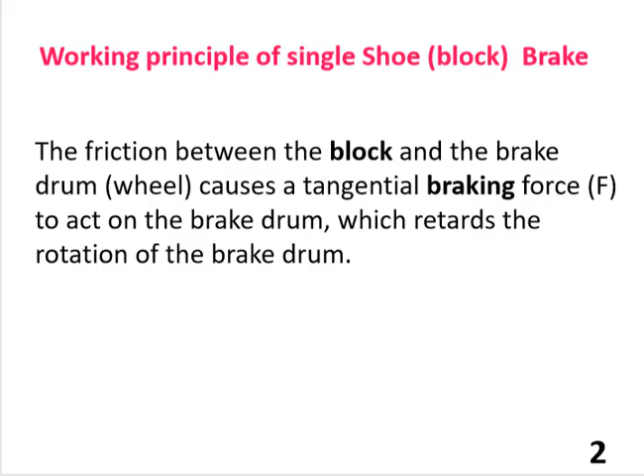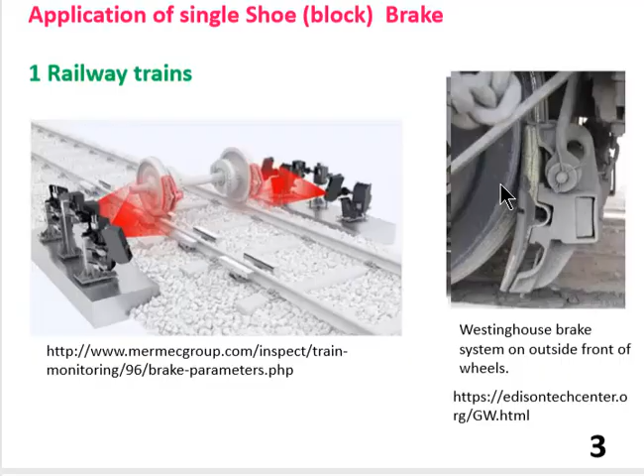In this figure you can see that the shoes are close to the drum, and with the shoes there is a block, and to the block the lever is connected. The shoes are pressed on the drum, and due to the friction between the shoes and the drum, the motion of the drum retards. Another example of the shoe brake is tram cars.

In this figure you can see the picture of the tram car. You can also see that on the roads you can't see the track, as the tracks are within the roads. You can see that the wheels are connected with the shoes, and to the shoes there is a block and lever. Now the shoes stop the drum or the wheel when the lever is operated.

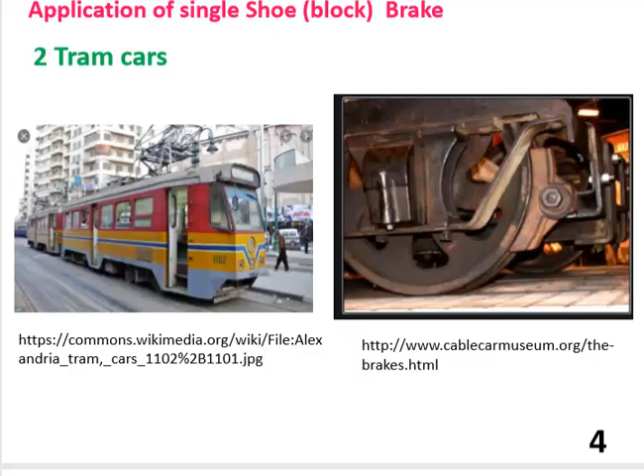Let us go to the next example, that is electric overhead traveling crane. So in the crane also there is a drum onto which the brakes are applied. The other application is hoisting machines. Brakes are also used in Charpy impact test and Izod impact test.

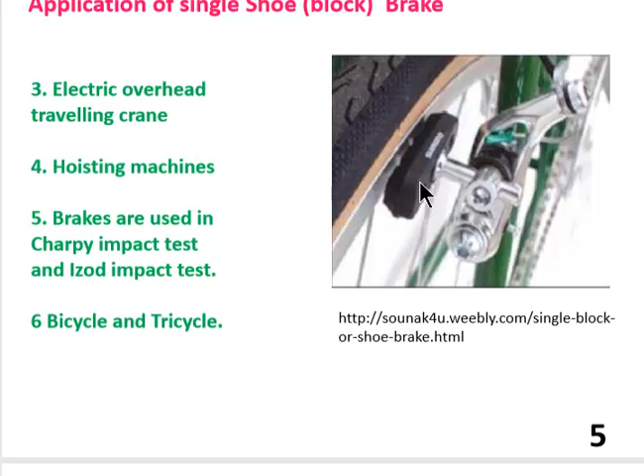Now we know that single shoe brakes are used in bicycles as well as tricycles. This is one of the figures of a bicycle, and you can see the shoes come in contact with the rim of the cycle wheel, and when the shoes are pressed against the rim of the wheel, the braking action takes place.

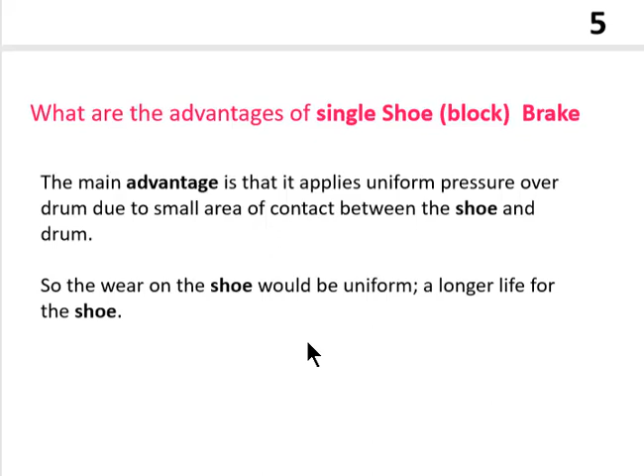Let us see what are the advantages of the single shoe brake. The main advantage is that it applies uniform pressure over the drum due to the small area of contact between the shoe and the drum. So the wear on the shoe would be uniform, and a longer life of the shoe can be achieved. This is one of the advantages of using single shoe brake.

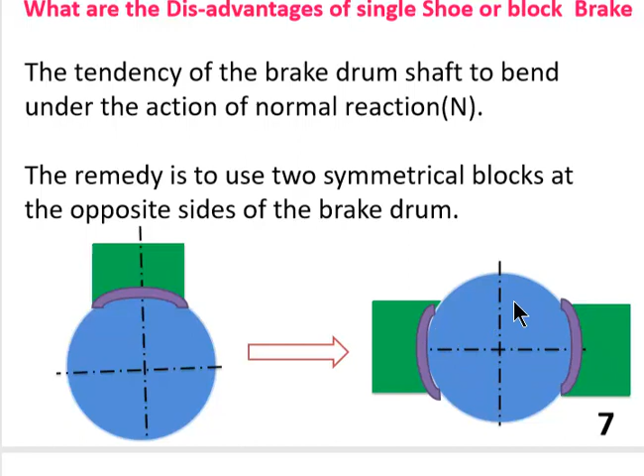There are some disadvantages as well. There is a tendency of the brake drum shaft to bend under the action of normal reaction, so the shaft or the drum can bend. The remedy is to use two symmetrical blocks at the opposite sides of the brake drum. So if you have a single shoe brake, there is a tendency for the shaft to bend. To reduce that tendency, two shoe brakes can be used on either side of the drum, so the tendency of bending of the shaft is reduced.

Let us look into the assumptions in the single shoe or block brake. The first assumption is that the block is rigidly attached to the lever. The second assumption is that the angle of contact between the block and the brake drum is less than 45 degrees. Hence, uniform pressure distribution between the block and the brake drum can be achieved. It is therefore reasonable to assume that the normal reaction and the friction force are concentrated at the midpoint of the shoe. But there is a case, case 4, in this type of problem where this assumption is not valid. At that point we will look into case 4 in detail.

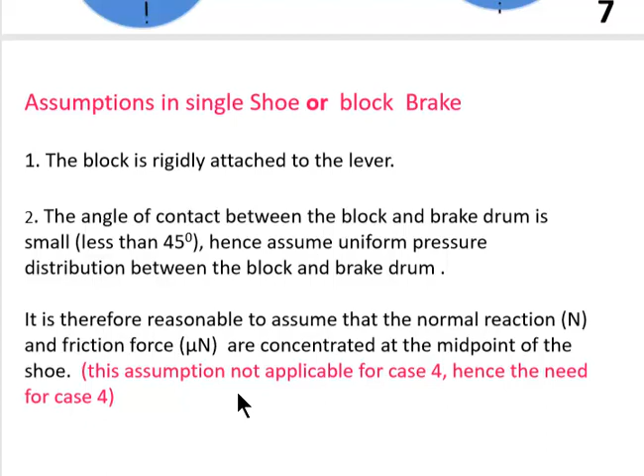Let us look into some classifications of single shoe brake. The two major classifications are short shoe brake and long shoe brake. In the short shoe brake, theta is less than 45 degrees. In long shoe brake, theta is greater than 45 degrees. In short shoe brake, the block or the shoe is fixed. In long shoe brake, the block is pivoted.

Now, when theta is less than 45 degrees, there are three cases and arrangements of the lever. Case 1 is one arrangement where it can be clockwise and anti-clockwise, and the formulas change between clockwise and anti-clockwise. The same is true for case 2 and case 3. So in total there can be 6 formulas: for case 1 there are 2 formulas, for case 2 there are 2 formulas, and for case 3 there are also 2 formulas. Therefore there are 6 cases that can arise from this particular short shoe brake.

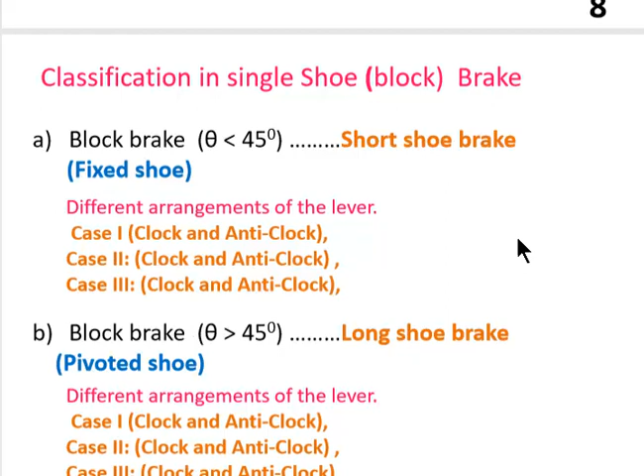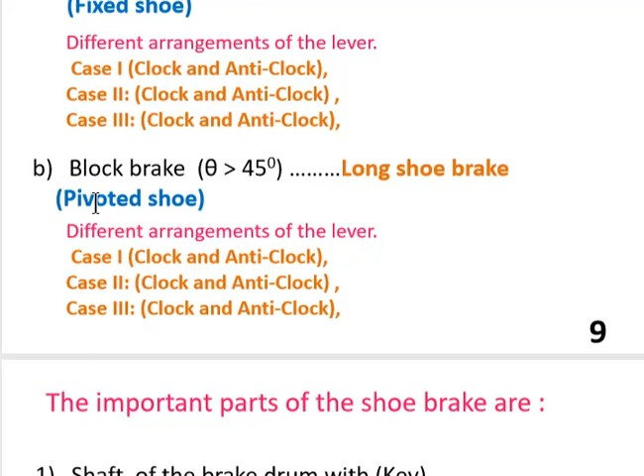Similarly, there can be 6 cases with respect to the long shoe brake as well. But as I told you, here the block or the shoe is pivoted to the lever, whereas for the short shoe brake the shoe is fixed to the lever.

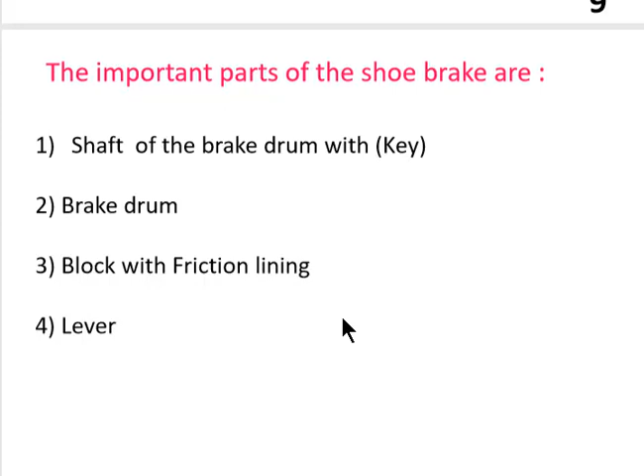Let us see some important parts of the shoe brake: shaft of the brake drum with key, brake drum, block with friction lining and lever. So these are some of the important parts of the single shoe brake.

Let us look into the terminology of the short shoe brake. Mu is equal to coefficient of friction. A and B are brake lever dimensions. E dash is the location of the hinge pin, that is the distance between the fulcrum O and the line of action of force. F is the friction force. Mt is the braking torque.

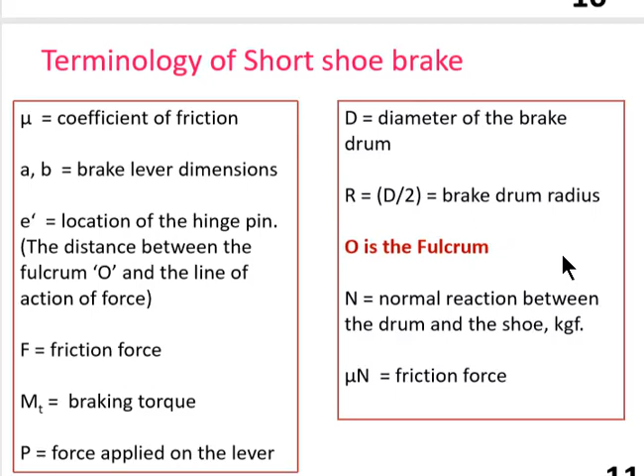Capital P is the force applied on the lever. Capital D is the diameter of the brake drum. R is equal to D by 2, that is the radius of the brake drum. O is the fulcrum. N is the normal reaction between the drum and the shoe. Mu N is equal to F, that is the friction force.

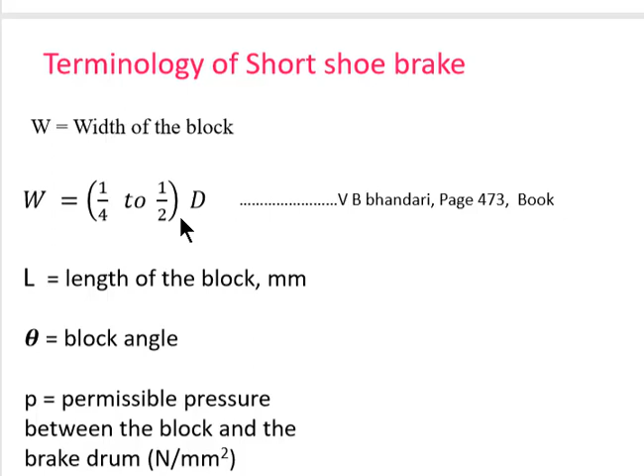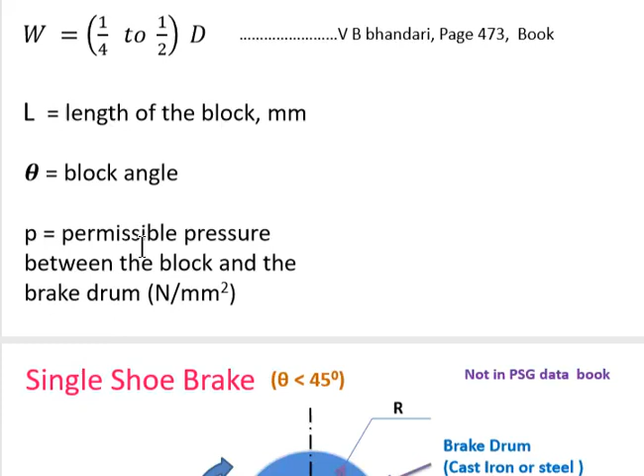Some other terminologies of the short shoe brake are: W is the width of the block. W can be 1/4 to 1/2 times D. This particular relation is obtained from V.B. Bhandari. L is the length of the block. Theta is block angle. Small p is the permissible pressure between the block and the brake drum.

In this figure of the single shoe brake, we can observe that the drum is shown in blue color and it is rotating in the clockwise direction. It can be observed that the friction force F is in the same direction as that of the drum. If the drum was rotating in anti-clockwise direction, then F would be in the opposite direction. The drum is generally made of cast iron or steel.

Here we can see angle theta. Now theta is the block angle and it is the subtended angle between the blocks. We can see that the force F is acting exactly at the midpoint of the block, that is point Z. It can be noted that this assumption is fairly accurate when the angle of lap theta is less than 45 degrees. It is based on the assumption that the pressure intensity is uniform between the shoe and the drum.

The brown color here is the lever, and the lever has a fulcrum at one side and is acted upon by a force called capital P. The fulcrum is called point O. Here we have B, the distance between the fulcrum and the center of the drum, and small a, the distance between the fulcrum and the actuating force P. The fulcrum is located below the friction force, hence the distance between the fulcrum and the friction force is shown as E dash. You can observe that this figure is not shown in the PSG design data book.

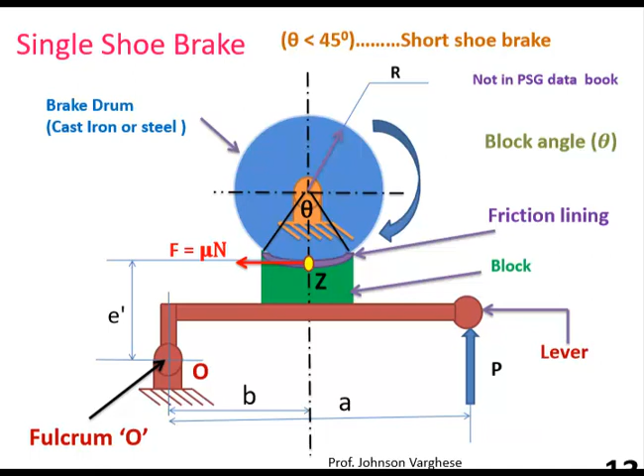Hence, we will also discuss the figure drawn in the design data book, which is quite similar. The block brake consists of a simple block pressed against the rotating drum by means of the lever. The friction between the block and the brake drum causes retardation of the drum. The angle of contact between the block and the brake drum is usually small. When it is less than 45 degrees, the intensity of pressure between the block and the brake drum is uniform. It can also be observed that the block is rigidly connected to the lever.

Let us look into the free body diagram of the brake drum. We'll start with the lower portion. In this figure, we can see there is a lever of brown color, rigidly and firmly connected to the block, and the block consists of a green color part and a purple color part. The purple color part is the friction lining.

The block, as I said, is connected very rigidly with the lever. So when the lever is pushed in the upward direction, the block also moves in the upward direction, and then the block comes in contact with the drum, and the drum retards its motion and comes to zero motion where the velocity is zero.

Now when the force P is applied on the lever, a normal reaction N acts in the downward direction, and when a force is applied, a reaction force will act. The reaction force will also be generated on the brake drum, a vertical upward reaction force called N. So we have N acting onto the block and N acting onto the drum.

Now we can see that the drum is rotating in the clockwise direction, and when the block comes in contact with the drum slowly, the motion of the drum retards. When the drum is rotating in the clockwise direction, a frictional force F is acting on the drum due to the block, and F is called mu N.

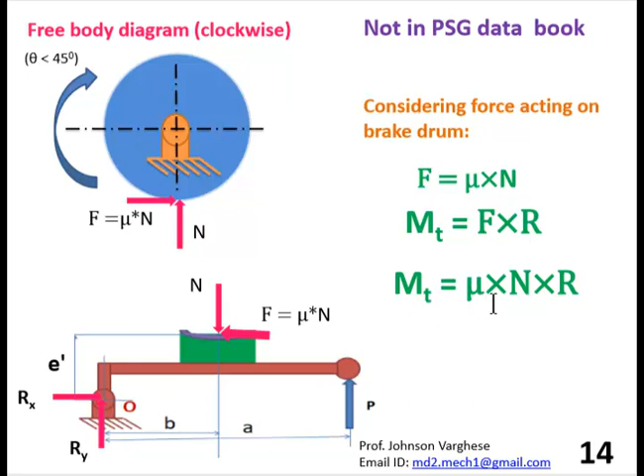When we are trying to find out the braking torque MT, that is equal to F into R, and when we substitute F, we get MT is equal to mu into N into R.

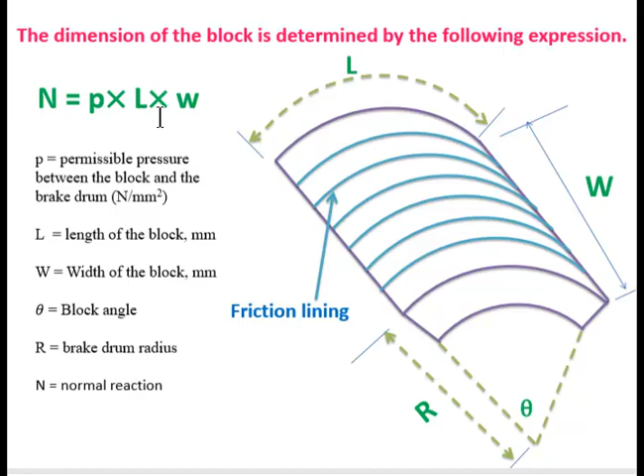The dimensions of the block are determined by the following expression: N is equal to P into L into W, where P is the permissible pressure between the block and the brake drum, L is the length of the block, W is the width of the block, and R is the radius of the brake drum. By using this equation, we can find out the different parameters connected with the block.

Now let us try to find out the reaction forces Rx and Ry. If you take the equilibrium condition with respect to vertical and horizontal direction for the lever and the block, you can see Rx, in the horizontal direction, is equal to mu N, acting along F, and Ry is equal to N, acting downwards, minus P, acting upwards. By using the equilibrium in vertical and horizontal directions, you can find Rx and Ry.

Now while taking the moment with respect to point O, when the drum is rotating in the clockwise direction, we can say that with respect to O, P into A minus N into B plus mu N into E dash is equal to 0. So we get this equation by taking moments, and by rearranging we get P is equal to (B minus mu E dash upon A) multiplied by N.

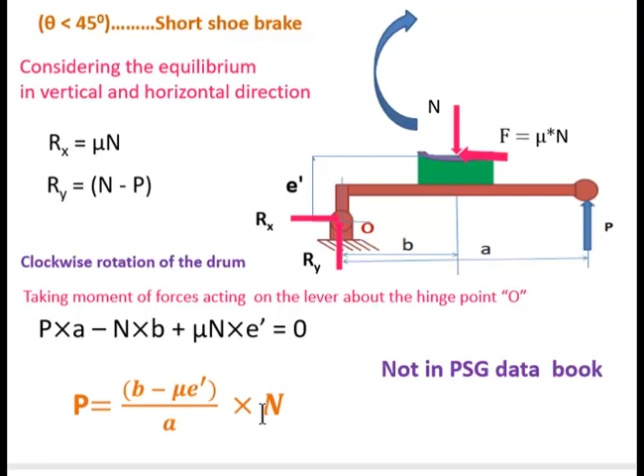The short shoe brake can be further classified into three cases as we have seen earlier. Let us see what these three cases are.

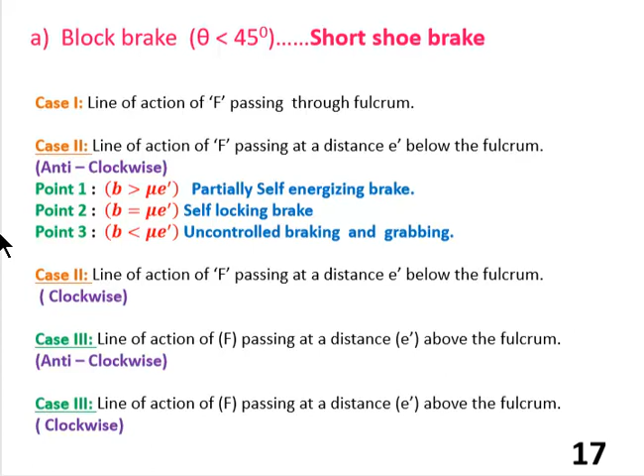In case 1, the line of action of F passes through the fulcrum. In case 2, the line of action of F passes at a distance E dash below the fulcrum, and this can be anti-clockwise or clockwise. In case 3, the line of action of force F passes at a distance E dash above the fulcrum, with respect to anti-clockwise, and this can be clockwise as well. So there are three cases in clockwise and anti-clockwise directions.

Now in case 2, you can see I have written point 1, point 2, and point 3. Point 1 says if B is greater than mu E dash, it is called a partially self-energizing brake. If B is equal to mu E dash, it is called a self-locking brake. If B is less than mu E dash, then it is uncontrolled braking and grabbing.

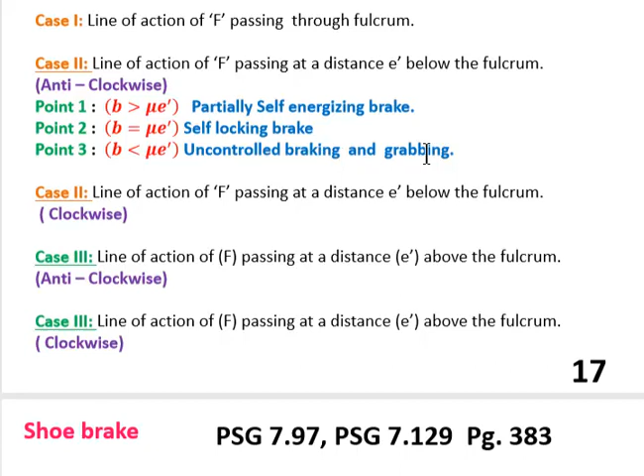In the coming slides, we will try to understand point 1, point 2, and point 3. This particular figure is given in the PSG design data book, page number 7.97.

In this figure, the lever and the block are located above the drum, and the drum is rotating in the anti-clockwise direction, with F moving in the direction of the negative x-axis. We can change this scenario: if the drum is rotating in the clockwise direction, F would be acting along the positive x-axis.

It can also be observed in this figure that the frictional force F is in line with the fulcrum O. The F and the O are in the same line. So this is the figure that is shown in the design data book.

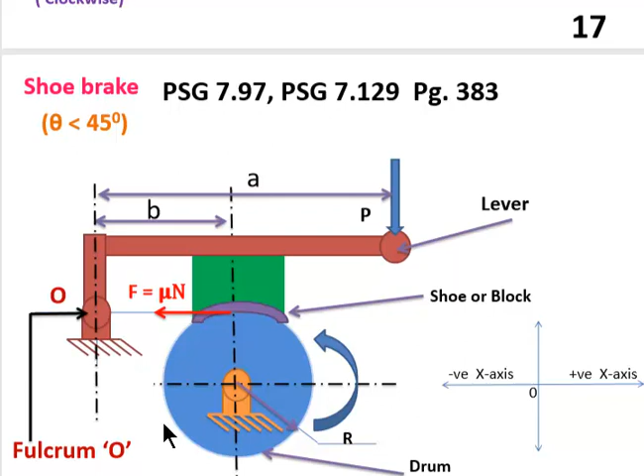Now it can happen that the F is passing little above or little below the fulcrum. According to that, case 2 and case 3 can be decided.

Let us look into case 1. In the design data book, page number 7.97, the fulcrum and the F are in the same line, so the line of action of F is passing through the fulcrum.

We can calculate the force F and the braking torque MT using these formulas given in the design data book. From this formula we can rearrange and find capital P, the force applied on the lever. We also know that F is equal to mu N. When you put F equal to mu N in this formula, P can be rearranged in this manner.

In case 2, you can observe that the line of action of F passes at the distance E below the fulcrum. In this case, we have to observe whether it is rotating in the clockwise or anti-clockwise direction, because formulas are available for both directions.

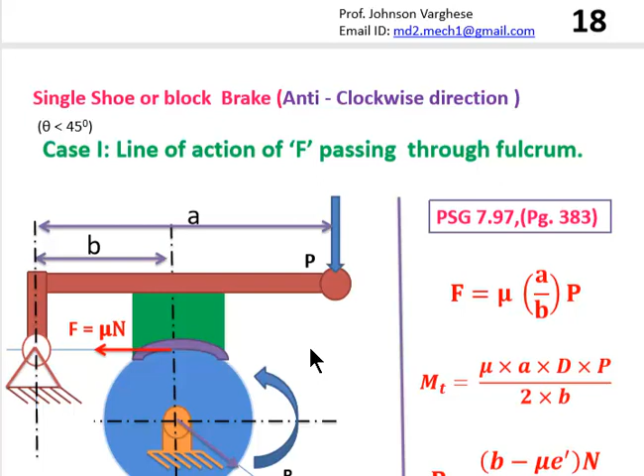In the previous case, since F is passing through the fulcrum, it's not important whether it is moving anti-clockwise or clockwise, because the formulas will remain the same in case 1.

But in case 2, because of the eccentricity E dash, there would be a change in the formula, so we have to observe in which direction the drum is rotating.

In this case, F is P multiplied by A upon B by mu minus E dash, and the braking torque formula is given by multiplying the force by D by 2.

In concluding case 2, we can observe that F is passing below the fulcrum point O, and case 2 is about the anti-clockwise direction.

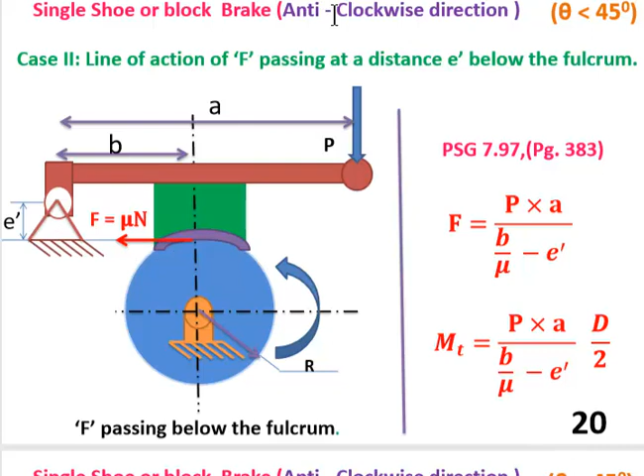Let us analyze this particular figure in more detail. We know the formula F equals P into A upon B upon mu minus E dash, and this equation is available in PSG 7.97.

We will substitute F equal to mu N in the above formula and get the following equation. Rearranging it in terms of P, we get it as B minus mu E dash into N upon A.

It's a very important formula, and at this point we'll discuss point 1, point 2, and point 3. Considering this formula where P stands for the load acting on the lever, in point 1, B is greater than mu into E dash.

In this condition, partially self-energizing brake is achieved. The friction force F helps in applying the brake, and this is a desirable condition.

In point 2, B is equal to mu E dash. In this condition, self-locking of the brake occurs, and this is an undesirable condition.

In point 3, B is less than mu E dash. In this condition, uncontrolled braking and grabbing occurs, and therefore it is an undesirable condition.

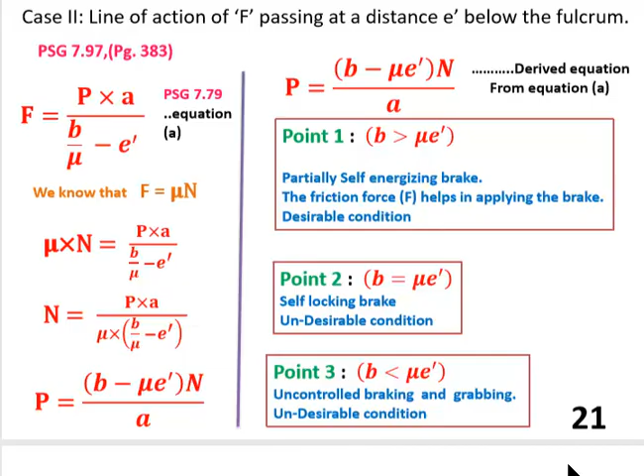In case 2, in the clockwise direction, the line of action of F passes at a distance E dash below the fulcrum. So you can see it is a clockwise direction with F passing below the fulcrum, and the formulas are given in PSG 7.97.

So we don't need to remember the formula. But the point here to understand is that these formulas can only be used for the clockwise direction and when the condition of F passing below the fulcrum is satisfied.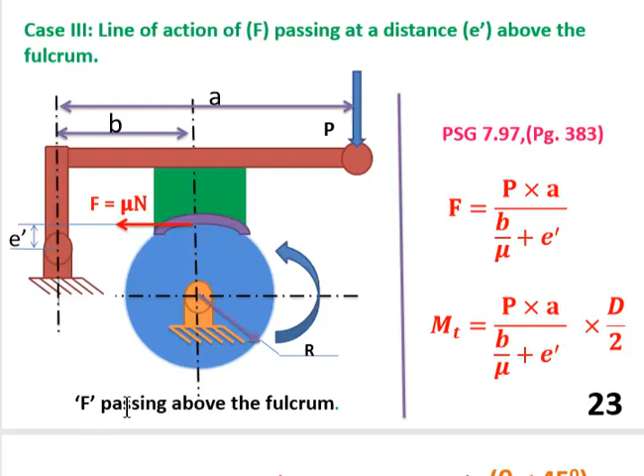We can also observe that F is acting towards the negative x-axis, and F passing above the fulcrum is satisfied. In case 3, clockwise direction, the line of action of F passes at a distance E dash above the fulcrum. So the distance between the fulcrum and the line of action is E dash, and the formulas are given on page number 7.97.

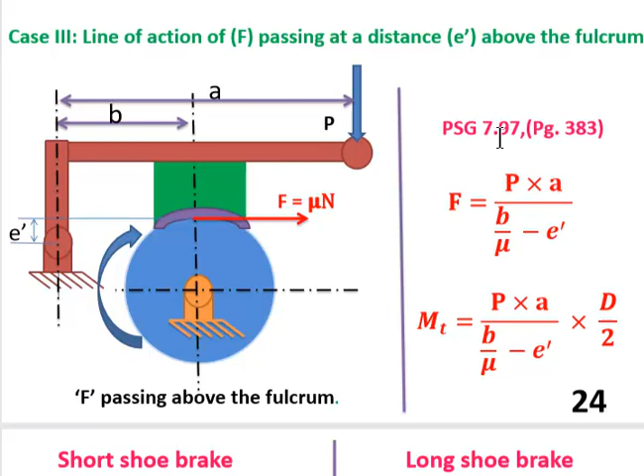We did not remember it. In short shoe brake and long shoe brake, let us compare. In short shoe brake, theta is less than 45 degrees and it uses a fixed shoe. In long shoe brake, theta is greater than 45 degrees and it uses a pivoted shoe.

You can see this block is connected with the lever and the connection is quite rigid. But in this case the block is quite huge and is pivoted to the lever, and this is why it is called a long shoe brake. The angle between them is less than 45 degrees in case of short shoe brake, and here the angle is quite more, even up to 90 degrees. Both are rotating in the clockwise direction and F is passing above the fulcrum.

We can see that there are 3 cases in the short shoe brake. Similarly, there are 3 cases for long shoe brake also, where F is passing above the fulcrum and also F is passing below the fulcrum. Three cases exist for both.

When it is less than 45 degrees, the intensity of pressure between the block and the brake drum is uniform, that's why it is called short shoe brake. When the angle is more than 45 degrees, the intensity of pressure is not uniform. Therefore we use a pivoted shoe so that there is uniform wear, and hence the concept of long shoe brake comes into the picture.

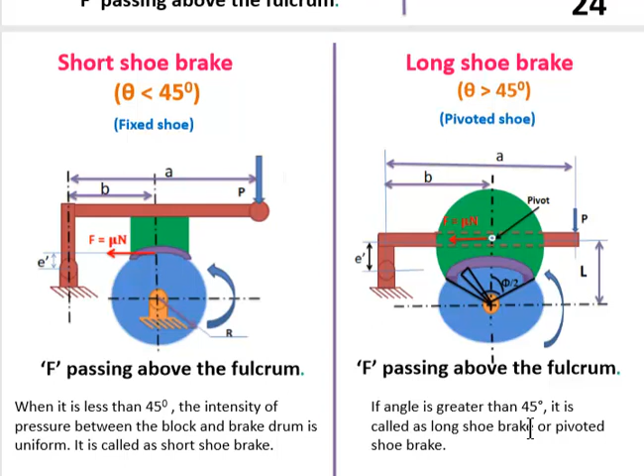Let us look at some terminologies of the pivoted shoe, also called case 4 for normal pressure distribution. Small p is the normal pressure on the shoe at the angle. P max is the maximum pressure on the shoe. W is the face width of the brake drum.

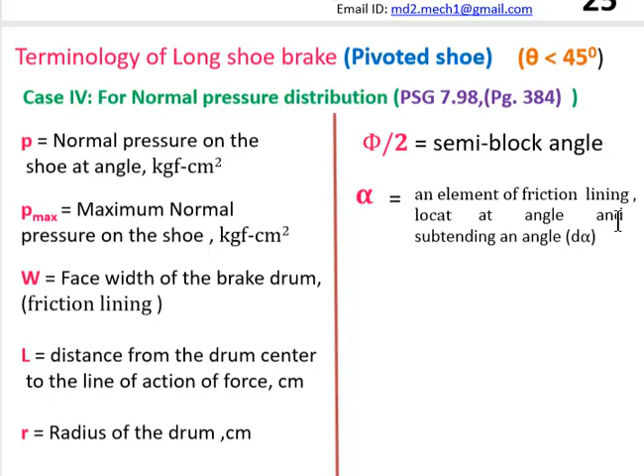L is the distance from the drum center to the line of action of force. Small r is the radius of the drum. Capital MT is the braking torque. Phi by 2 is the semi-block angle. Alpha is an element of friction lining located at the angle and subtending an angle d alpha.

Now we will look into the diagram of the long shoe brake. As I told you, there are 3 cases in the long shoe brake. We can also see that in this figure the fulcrum and F, the line of action of force, are passing through the same line.

Here the block is pivoted to the lever, as you can see at the center, and the lever is applied with a force called P, so that the lever can be pushed onto the drum with the help of the block and the retarding motion can be achieved. L is the distance between the center of the drum and the pivot.

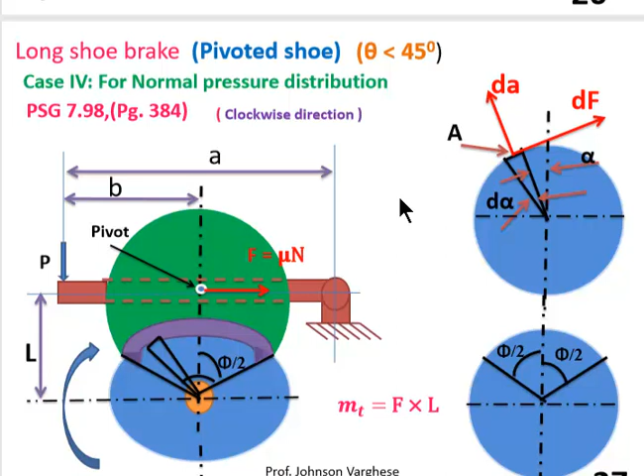To solve this formula and the equations, they consider d alpha, a small element on the drum which consists of an area dA and force dF. alpha is the angle from the vertical, and by solving these equations they try to find the force and torque required for the braking action. Phi by 2 is the semi-block angle.

Let us see the concept of the long shoe brake. When the angle is more than 45 degrees, the pivoted shoe is used, because the pressure between the shoe surface and the drum is not uniformly distributed. When theta is greater than 45 degrees, the non-uniformity of pressure must be taken into account, so a pivoted shoe is used instead of a fixed shoe. This ensures more uniform wear. The pivot is so located that the resultant friction and normal reactions have no moment about the pivot.

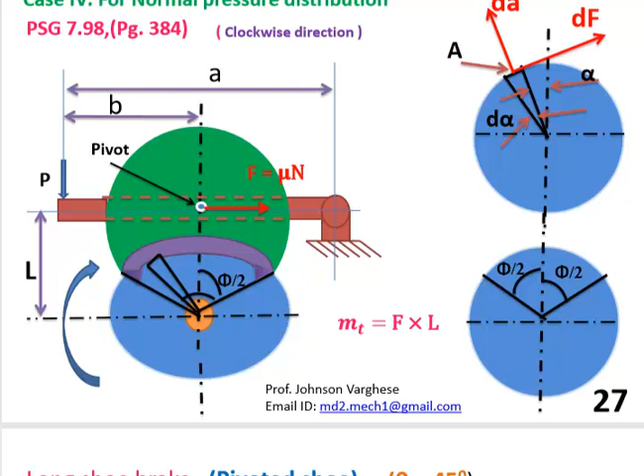If a moment exists, either the leading or the trailing edge of the shoe will wear rapidly. Thus the forces N and F act at radius L instead of radius R. This increases the friction torque, that is MT equals F into L. Hence in this case the braking torque is much more than the braking torque for the short shoe brake.

Let us look into the formulas for the long shoe brake. The two formulas involved are the friction force and the braking torque. The friction force is the same as that of the short shoe brake. It depends upon the position of the fulcrum with respect to the line of action of F, same as case 1, case 2 and case 3. It also depends on the direction of rotation, whether clockwise or anti-clockwise.

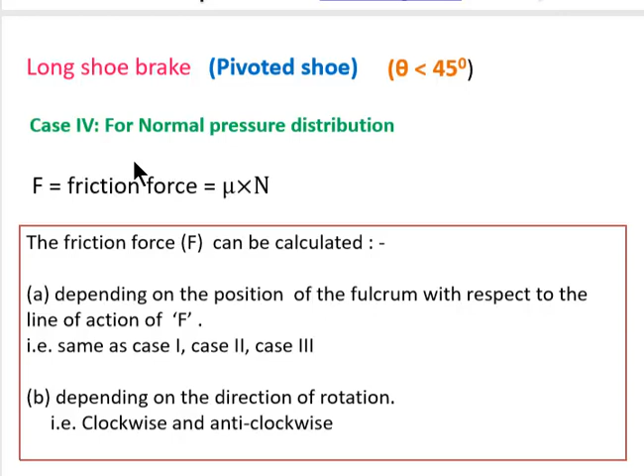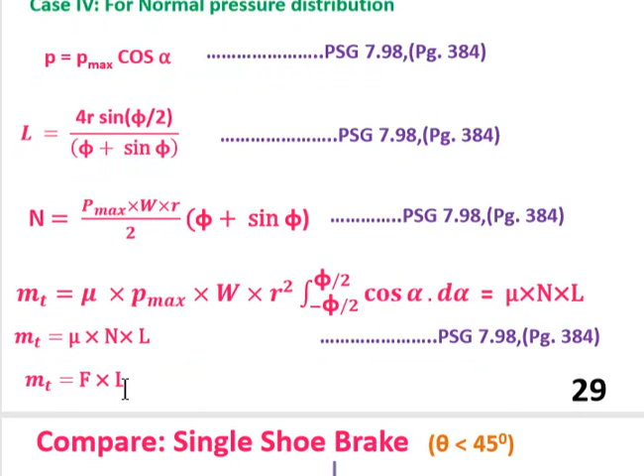Hence, no separate set of formulas are given for the long shoe brake with respect to the friction force. But we require to calculate L, and L can be calculated using this formula. P max can be calculated using this relationship, and N is the normal force given by this formula, where phi is given to you and W is the width of the shoe. MT can be calculated as F into L, where F is what we have seen earlier and L is the distance between the center of the drum and the pivot.

Now let us try to compare something about the short shoe brake when theta is less than 45 degrees. This is the orientation we have seen at the very beginning slides, and this is the figure given in the design data book. Both cases are rotating in the clockwise direction, and you can also observe that the fulcrum is quite below the friction lining, or it can be said that F is passing above the fulcrum in both the cases.

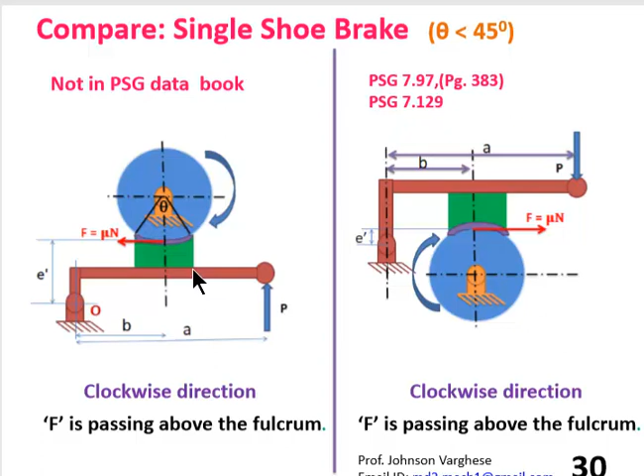You have to understand that even though the orientation changes, the formulas do not change in this case, because the direction of rotation is also the same and F is passing above the fulcrum in both the cases. If the lever is above or below, it doesn't matter, the formula remains the same.

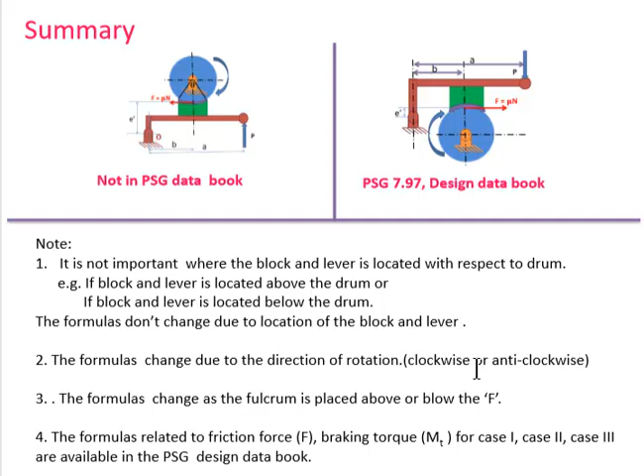Let us draw some conclusions with respect to that. It is not important where the block and lever is located with respect to the drum. For example, if block and lever is located above the drum, or if block and lever is located below the drum, it's not important in that case, and the formulas don't change due to the location of the block and lever. The second point to be noted is that the formulas change due to direction of rotation, whether it is rotating clockwise or anti-clockwise. This will decide which formulas you need to take.

The formulas change as the fulcrum is placed above or below F, so we have to look carefully which case it belongs to. The formulas related to friction force and braking torque for case 1, case 2 and case 3 are available in the PSG design data book, both for short shoe brake and for long shoe brake.

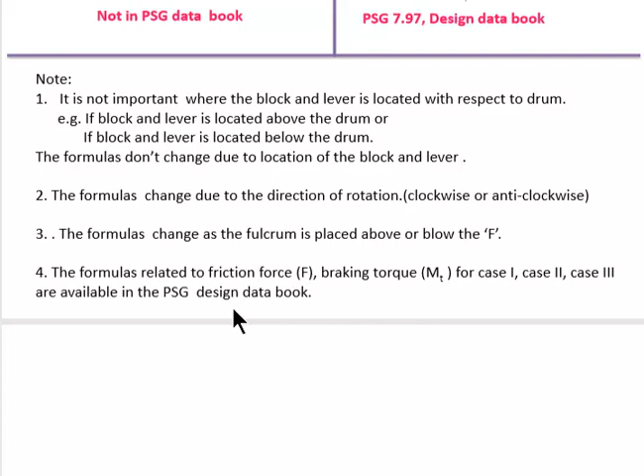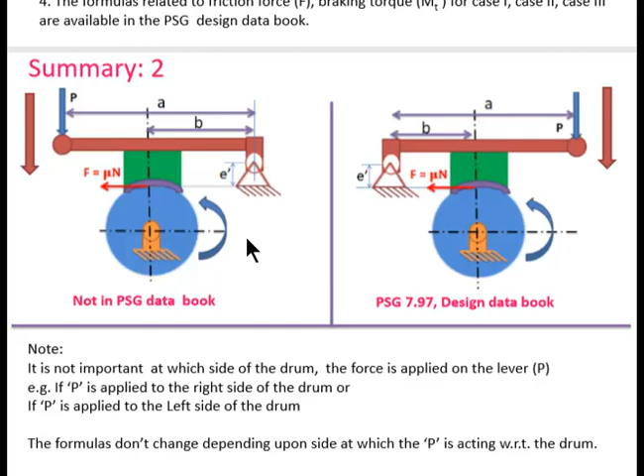Here to the left hand side P is acting, in this figure to the right hand side P is acting, and the fulcrum is in the opposite direction of that. But it has to be noted that the force applied on the lever, whether on the right hand side or left hand side, it doesn't matter. For example, if P is applied to the right side of the drum or P is applied to the left side of the drum, it doesn't matter. The formulas don't change depending upon the side at which P is acting with respect to the drum.

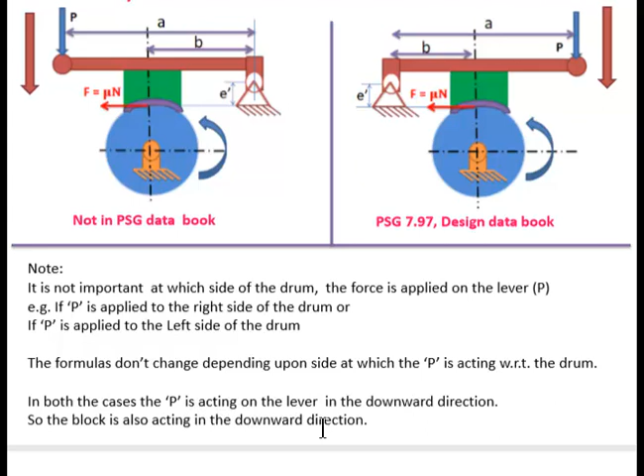In both the cases, P is acting on the lever in the downward direction, so the block is also acting in the downward direction. At this point we can say we have understood the concept of the single shoe brake.